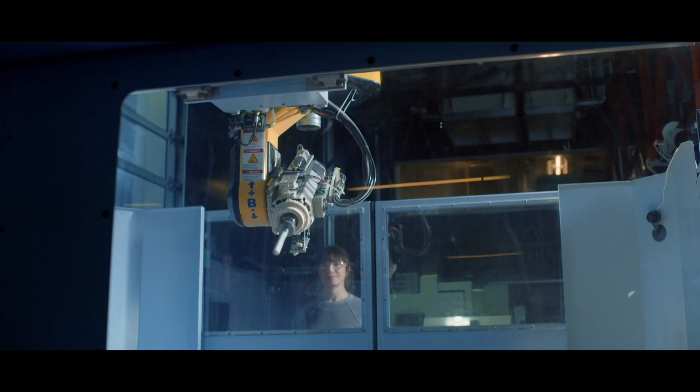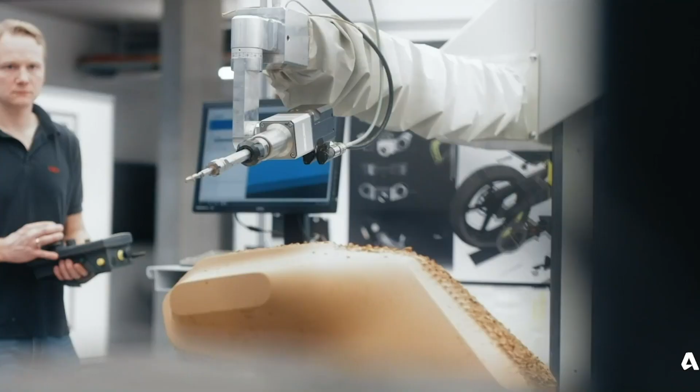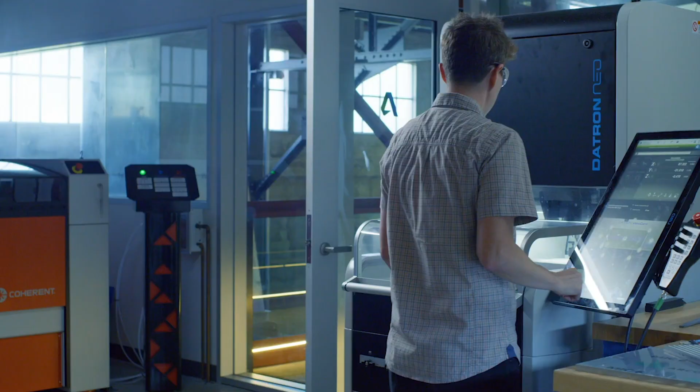I'm very pleased to be here at the Advanced Manufacturing Summit. This is a great time to be in the manufacturing industry. A lot of changes are happening in the way manufacturing technologies are coming together, how industries are coming together. What I see here today is a group of people completely immersed in the world of manufacturing, coming here to exchange ideas and information about how they look to the advanced technologies that will help them become more and more competitive in the manufacturing industry.

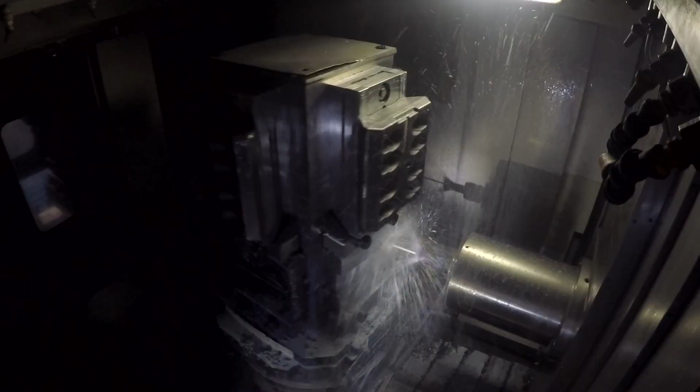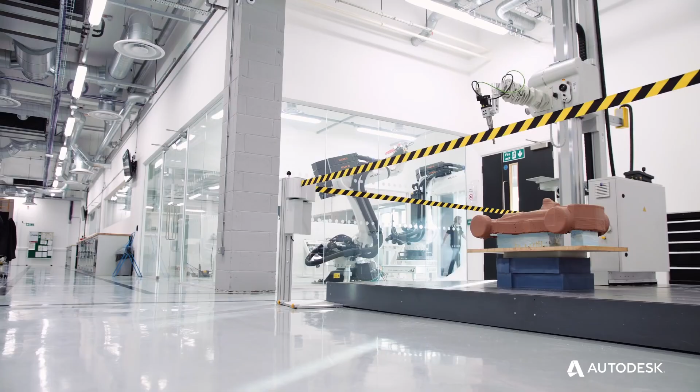This is the first time for Autodesk. This is the first virtual event, but more importantly, it's a first for the way we are bringing together the different disciplines of manufacturing in one venue. It's not a session dedicated to subtractive, or additive, or injection molding, or hybrid manufacturing. It's a session that addresses all aspects of manufacturing in one venue. This is the one time where all the experts devoted to different fields of manufacturing can exchange ideas and information about what change will propel the manufacturing industry forward as a holistic approach.

The theme of the conference is manufacturing through change, and this is a particularly relevant topic for today's times. What we have seen in the last two months is digital transformation that usually would have taken two years, compressed into a very, very short duration.

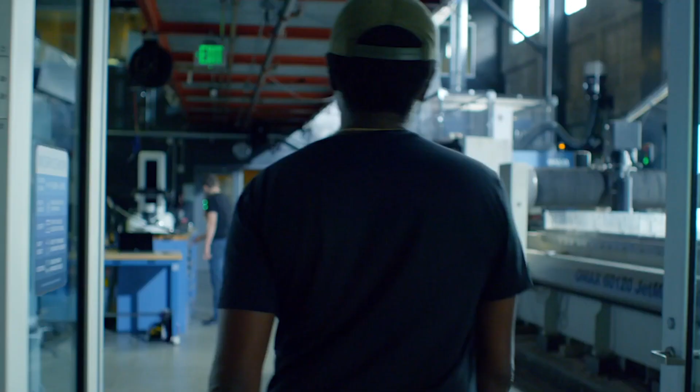And this is not just me saying it, this is analysis from Microsoft. What they're seeing across all industries is that the pace of change has compressed in the last couple of months because of necessity, because of the pandemic.

What's really exciting for me is this gathering of experts with enormous amounts of experience. This is an opportunity for all the expertise to cut across industries and disciplines. This is a time where each one of you has an opportunity to help each other in the face of this enormous amount of change.

In the next couple of days, you're going to hear from many experts on how they're using this opportunity to transform their companies. You'll also hear from Autodesk experts on what they can do to help you thrive in the face of this change, how they can help you compete more effectively. This is an amazing opportunity for you to learn about the latest and greatest technologies from Autodesk.

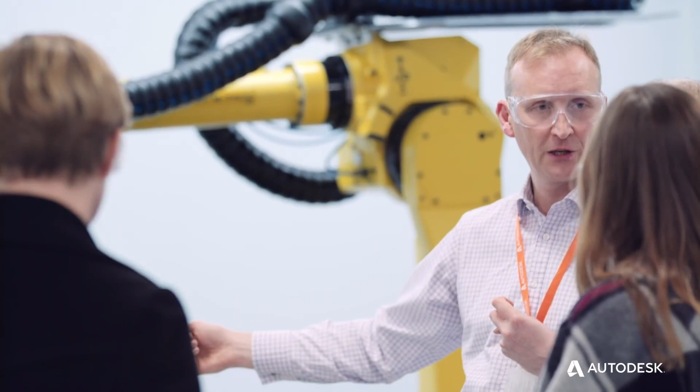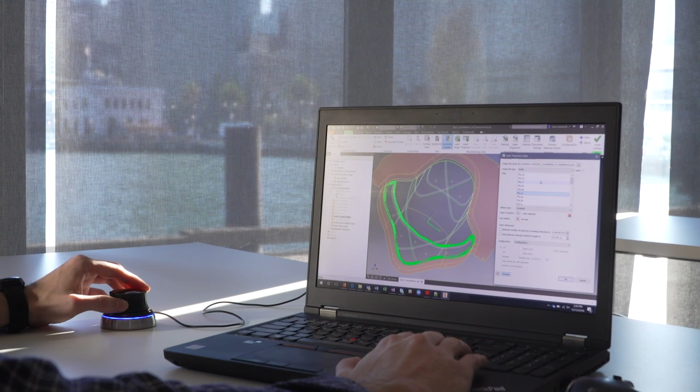One of the things we hear from customers about what's getting in the way of their digital transformation is the absence of consistent experiences as they go across different disciplines such as CAD, CAM, or CAE, and also the way in which they collaborate amongst teams, amongst departments, across the company, and across their ecosystem.

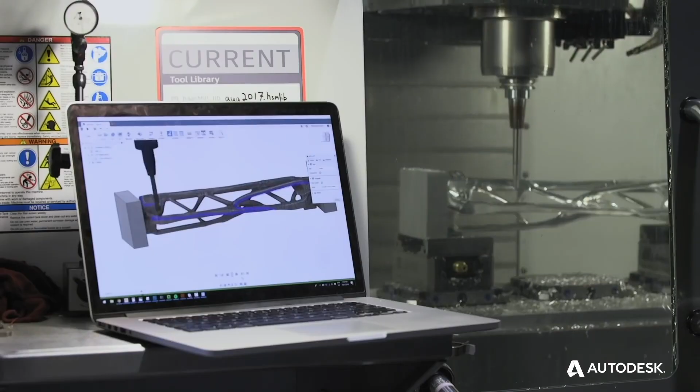What we have built with Fusion 360 is a simple way for different disciplines and different teams to come together in one product development and manufacturing environment. It is a product built on the basis of helping people make things.

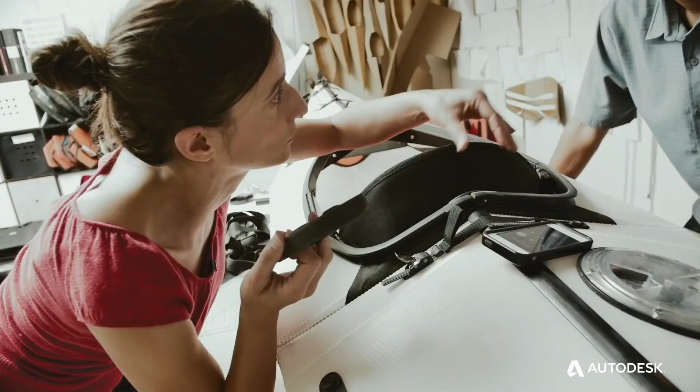We are very convinced that the product development and manufacturing of tomorrow is not about just painting pixels on the screen. It's about enabling customers such as yourself to make products that compete more effectively in the market and are able to drive more profits for you.

Fusion 360 enables simple, in-context collaboration by giving people access to information anytime, anywhere. This is fundamentally what teams expect, irrespective of where they're working. This is especially relevant now as teams are having to cope with remote work. The teams that were co-located in one location before are now distributed across the entire planet.

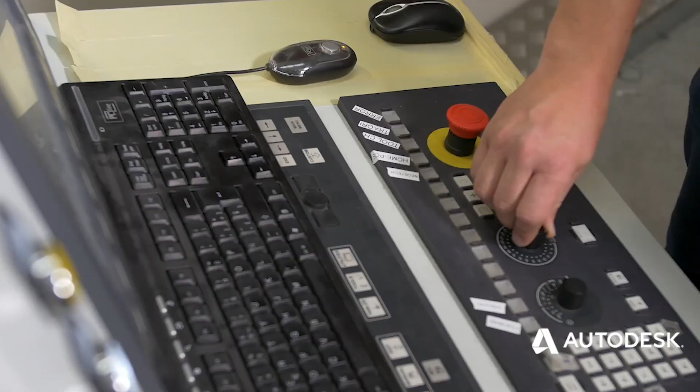This is where Fusion 360 can play a big role in helping teams come together in a virtual collaborative environment. Not only does Fusion 360 provide access to the latest manufacturing technology ranging from subtractive, additive, and hybrid manufacturing, it also includes the next generation technology powered by artificial intelligence and machine learning.

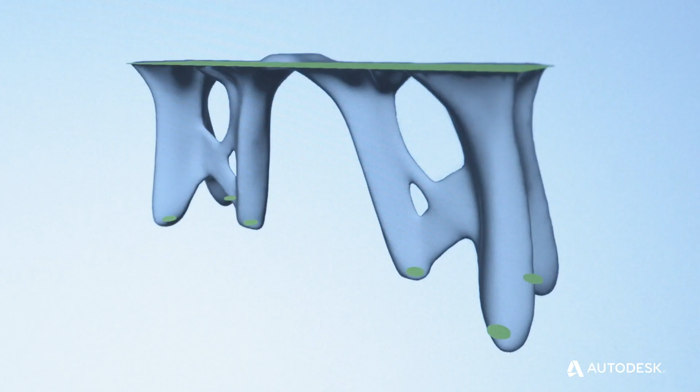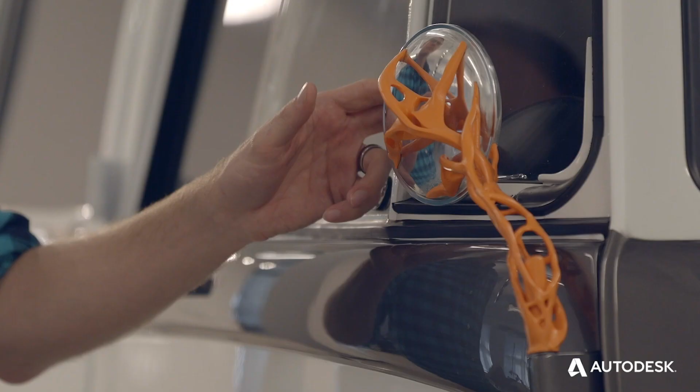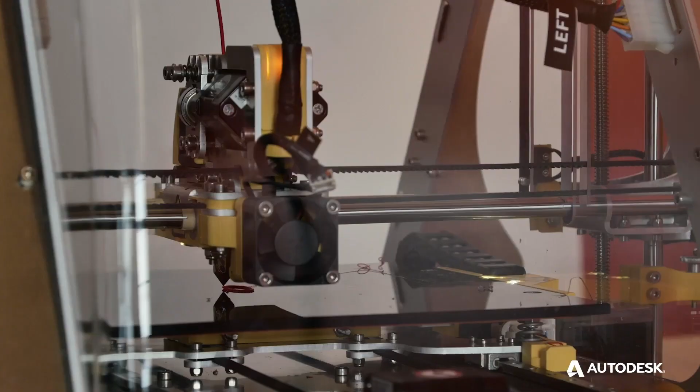This is generative design. Generative design is not a design technology or a manufacturing technology, it is the combination of both, which allows designers and manufacturers to define problem statements and their objectives. This manufacturing-aware algorithm then provides designers and manufacturers a range of options they can consider in order to be successful in their problem domain. This is how next generation manufacturing will be done.

Fusion 360 gives you access to the new manufacturing extensions. Manufacturing extension gives you access to specialist technology on demand just when you need it. I'm excited to announce today that we're bringing new value to our power solutions. Starting in September, PowerMill, PowerShape, and PowerInspect will be offered with Fusion 360.

What this change means for you is very simple. You'll be able to use PowerMill, PowerShape, and PowerInspect just like you use them today. In addition, you'll be able to amplify your design and manufacturing workflows using Fusion 360.

Not only that, we're giving you access to all the features in the Ultimate tier at a more affordable price point. I'm thrilled that Autodesk is able to deliver this amazing value to you, especially at this time as you're worried about your cash flows. I'm particularly excited about what you will be able to do with this technology to build really great products.

If you're curious about how PowerMill and Fusion 360 can work together, be sure to check out Rob Walker's session on day 3. In addition to Rob's class, the Autodesk team will be running many great sessions at the summit. But the sessions I personally enjoy the most are the presentations given by our customers. I love to hear your stories.

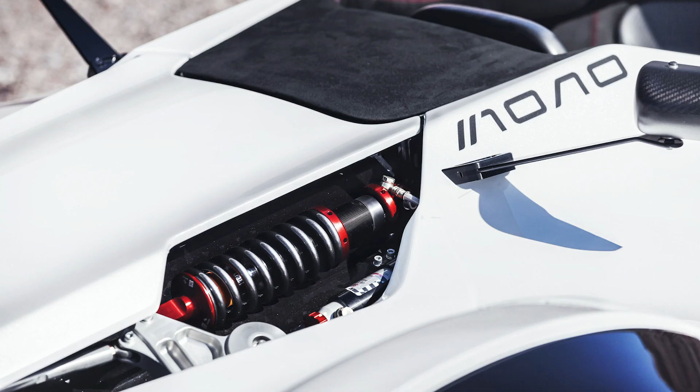The next story you're going to hear from one of our amazing customers, the Briggs Automotive Company in Liverpool, England, is the one that really showcases the idea of convergence that I was talking about earlier. Their work brings together functional and aesthetic design considerations with advanced material science and multiple manufacturing methods, which all contribute to a grand vision that can be best described as an ultra-high performance work of art. The new BAC Mono.

But I've said enough. Let's hear from Neil Briggs.

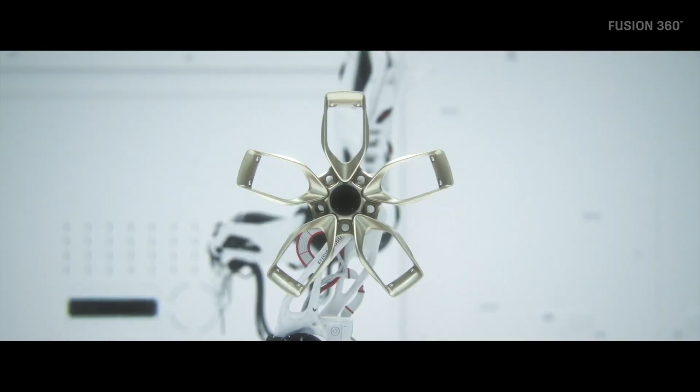My name's Neil Briggs. I'm co-founder and director of product development here at BAC. The business was founded in 2009. Since then, we've delivered cars to over 41 territories around the globe. We've been on an incredible journey with our partners, suppliers, and of course our customers.

So the initial idea for the car started way back in the mid-90s when Ian and I started our own automotive design consultancy business, predominantly based in Germany. The vehicle architecture almost identified itself.

It's inspired by a formula style layout, whether that be IndyCar, Formula 1, Formula 2, Formula 3. It's clear that the driver sits in the middle. The engine is mounted longitudinally along the center line of the vehicle, directly behind the driver, as is the driveline and the gearbox, which is then mounted further behind it. So the hard points of the car actually started to pretty much define themselves fairly easily from day one.

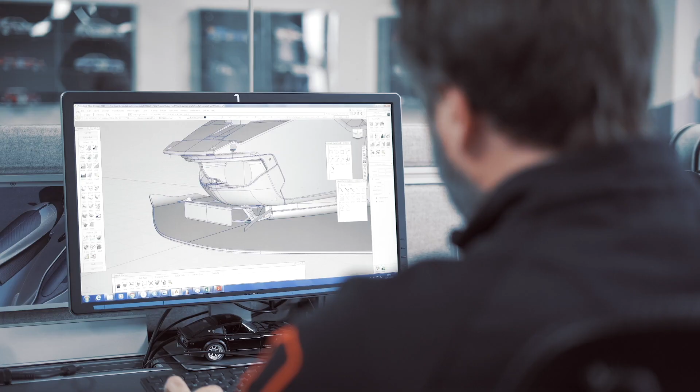There's a clear line as to what we focus on, and that is all about improving performance, and therefore we have this obsession, some might say, with weight save. So for us, we focus on clever use of materials. We focus on our processes and our clever use of the available softwares that we have to us in order to optimize the components on the car.

A classic example of some of the innovation we've got here at BAC is our two-piece carbon hybrid wheel. So we've taken an alloy wheel, the lightest 17-inch alloy wheel in the world. We've made it 2 kilograms lighter. But we weren't content with that. We wanted to move that forward.

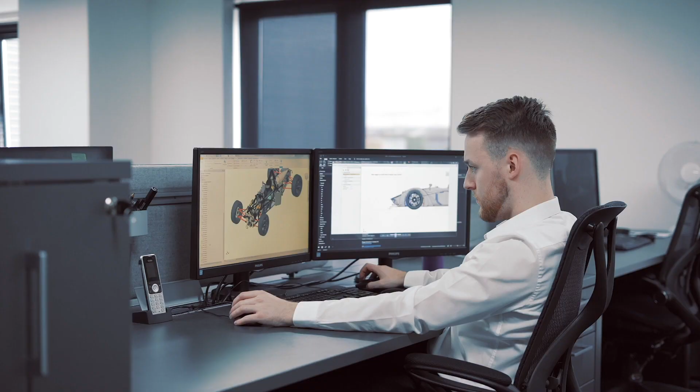And that's where we utilize generative design, working very closely with our friends and colleagues at Autodesk to basically apply the same load case to the same wheel to see where we can optimize the structure. And using the constraint system within the software, it meant that we could constrain the areas of the wheel that the designers were particularly protective about, and that then forced the software to look into specific areas to optimize the weight reduction.

And I think the solution that we've come up with is absolutely incredible. We've saved an incredible 1.25 kilo just from the centerpiece alone. So we've moved this lightest wheel already further into just a completely different stratosphere. It shows a real nice development from the original wheel, which was designed in 2014, to our new wheel in 2020. And I'm going to take you up close and personal and show you the details around that wheel shortly.

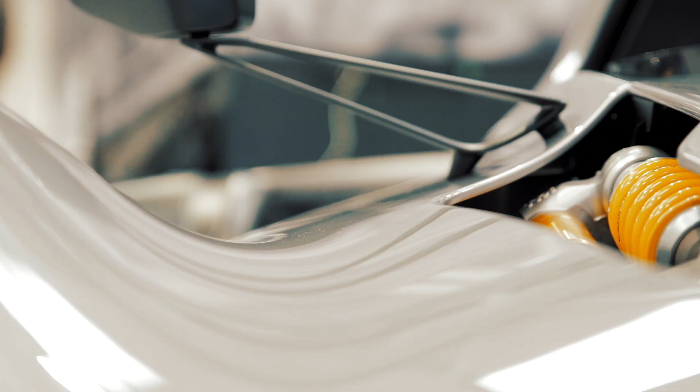So there's lots of disruptive innovation and technology that's on the new Mono. Mono R, and that's been carried across onto the new Mono, was the first car in our history to utilise 3D printed parts, and with clever use of some of the new carbon filled materials now. For the first time in our history, we've actually become a supplier to the main manufacturing centre, which is where we're sat now, for components.

We can try them on the car, we can test them on the car, and now as I sit here today, we've got actually over 44 3D printed parts on the car. So BAC was the first company in the world, and specifically in the automotive sector, to utilise graphene enhanced composite body panels. What that does on a molecular level is the graphene essentially enhances the structural properties of the carbon fibre.

It means that we can actually take the number of layers of carbon fibre out, the lamination, out of the part, and therefore reducing weight.

We're already attracting interest from other premium luxury automotive manufacturers who are interested in our journey with graphene. They understand the volumes that we're making at 30, 40 cars a year. Yes, that will be applicable in 1 or 2 years' time for perhaps the next McLaren Senna.

So the new Mono represents the next stage of our design DNA, described by Jeremy Clarkson as one of the most iconic shapes he's ever seen. The car never ceases to amaze me or anyone else who sees it, just how striking it is.

And to move that design forward actually was a really tough challenge. The car has got this slightly more aggressive, lower, sleeker, longer stance, which is even more striking and looks incredible.

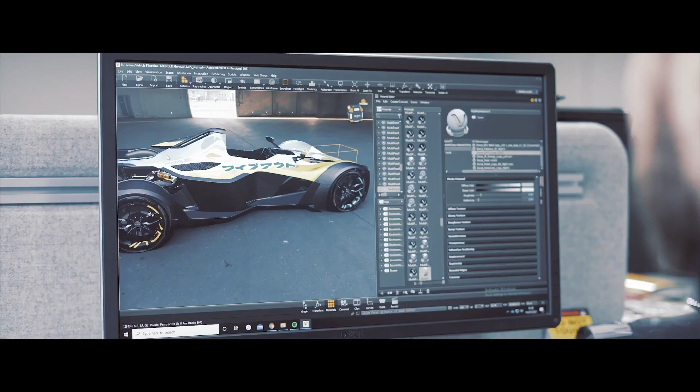So I'm going to go ahead now and give you an overview of the new Mono, and specifically some of the new aesthetic or brand DNA which we've moved forward with this car as part of the evolution of the design. And we're going to start basically on the front of the car.

So the brief predominantly was because the engine produces more power, therefore it rejects more heat, and therefore the radiators are bigger. So you'll notice that the lower to upper body ratio has changed. It's given the car more of a larger feel in this area, more volume.

So there's therefore a need to get more airflow to the radiators, so therefore we've looked to clean up the front end and reduce the frontal area. You'll notice that the lighting area specifically has gone from 4 lights down to 2. We've combined the indicator with the dip main beam, and then the main beam is now positioned in the front of the car.

So what that's done is it's reduced the restrictions for the airflow essentially through the car, so we can feed those radiators with more air. But it's also formed in the center section almost like an aerofoil profile in plan view, which helps us to sculpt the air from the front of the car, maintain attached air around the chassis section, into the side pods, around the side pods, and then maintain that attached airflow along the length of the car, and ultimately reduce the drag out the back of the car.

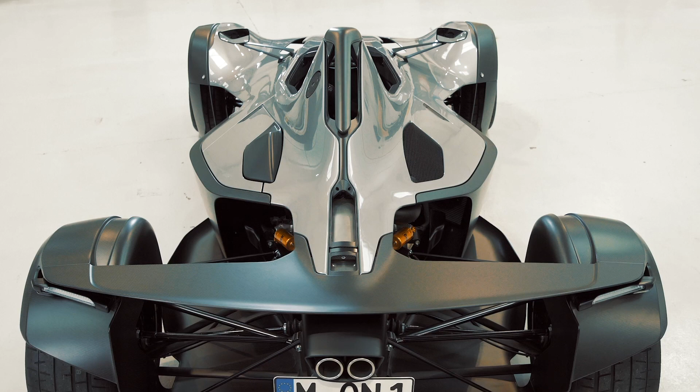The rear end has been completely restyled, so the rear wing profile has changed. It's a fixed rear wing, which works well and in harmony with the diffuser. The diffuser angle is unchanged from the original car, but the chord length and the profile of the rear wing has changed significantly to sleeken that off, which gives the car ultimately supercar credible top speeds of over 170 miles an hour.

But I think the real headline with this car is how quickly it will accelerate. 0 to 60, 2.7 seconds, so it's the fastest rear-wheel drive accelerating car in the world. We haven't quite got the four-wheel drive EVs licked just yet, and then 0 to 100 in under 6 seconds. So it's really a shattering performance, but very, very accessible and very, very rounded for the driver.

A few more key things about the aesthetic. You'll notice that for the first time now, we have body panels which allow us to access the engine for servicing. So it's no longer a one-piece body, it's several pieces that have been manufactured together.

Again, at the front end, you'll see there's been a declutter. We now have an electronic front hatch system, which means we no longer need the latch. So there's a lovely, nice, smooth surface there, which really forms part of the new aesthetic.

And then a thinness to all of the design. You'll see the surfaces now have this real efficiency, and kind of liken that to nature, where you've got an athlete, where you can see the skin stretched over these super taut muscles. It gives it a real purposeful feel to what the car is all about, which is ultimately its DNA.

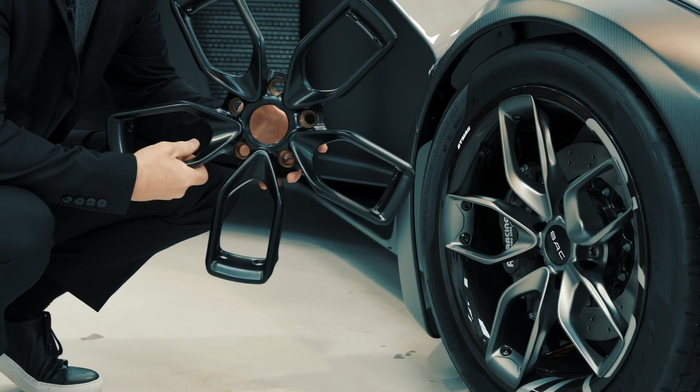I think one of the most noticeable aspects of the car as well are the new wheels, which I'm going to tell you a little bit more about in detail. And to allow me to tell that story, I'm just going to take some of these 3D printed parts that I've got here, and we'll do this around the front wheel, around the carbon hybrid wheel, which essentially is a two-piece wheel. So this is the center section, and you'll notice that the outer section is made from carbon fiber.

For those of us who are familiar with moments of inertia and calculations, you'll know that it's most important and influential to save weight at the outermost point on the rim. It's to the power of 2, so therefore its influence is squared.

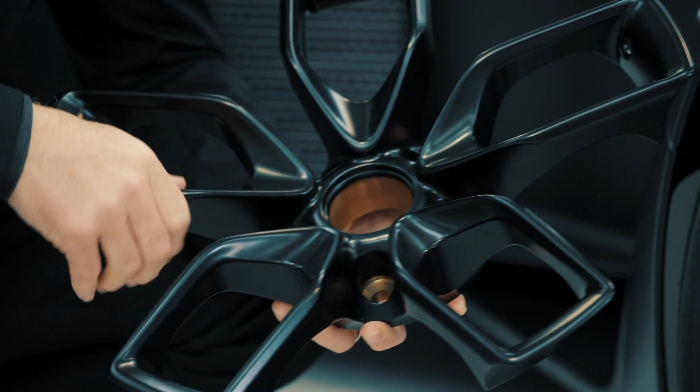So we save the weight on the rim, and we produce that in carbon, and then the center section is made with a forged billet aluminium, which is then machined. This is the original wheel we designed in 2014 on a 3-axis machine, and it's held together with titanium bolts and a patented system that connects the two parts together. That was our option wheel.

We've now moved that story forward with the help of generative design, applying the same load cases. So what we basically do is set up our constraints, firstly our load constraints - we apply the same loads we did when we designed the original wheel - and then we set up our geometrical constraints, principally around the package we want to design the wheel around. So for us, obviously the caliper, the brake, how the wheel attaches, which has remained fundamentally unchanged from the original wheel. But from a pure aesthetic perspective, we wanted to achieve something in harmony with the rest of the car's design and its aesthetic.

This thinness - using the geometrical constraints within the software, it allowed us to maintain this 5-spoke design from the original. We restrained these particular surfaces, and the 5-spoke design fundamentally, so it's an evolutionary design. What that did is make the algorithm and software focus on saving weight around the center section, and particularly in the side.

So you'll see now the wheel has a thinness to it, which is all part of this athletic, nature-inspired feel that the rest of the car has. The wheel is very much in harmony with the new design, and it's incredible to see the significant pocketing that's happened in various different areas.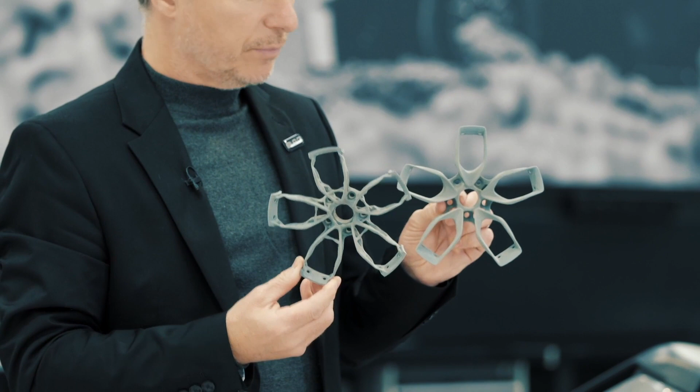But this is how far we can actually go. These are 3D printed prototype parts, just for us to have discussions about how far we can take generative design. But it's just incredible - it starts to develop a completely different aesthetic from what we know today.

And of course, the design challenge for the design team is at what point do we introduce that aesthetic, and what does the rest of the car look like to make sure the wheel is in harmony with what you'd ultimately see through it and behind it, and the rest of the car. So for us, the journey with generative design is actually just starting.

The wheel is just the start. We plan to do a whole bunch more work around the car in terms of system optimization. And it's going to be really interesting to see the weight saves we're going to achieve with the further work we're going to do, and how that will affect the aesthetic, but equally important, the driving experience.